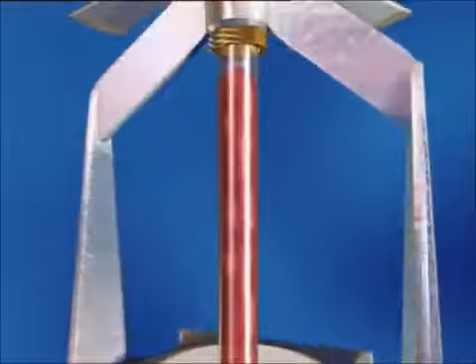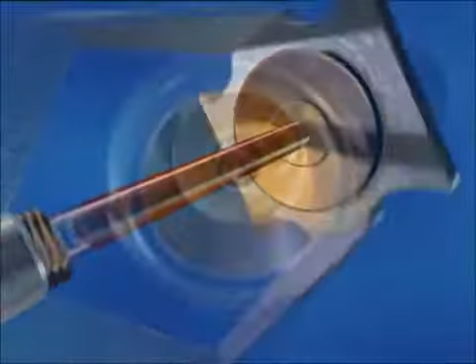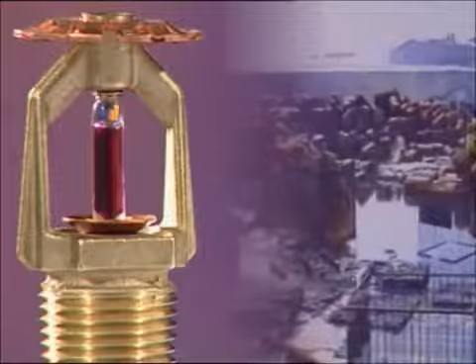Fire sprinkler systems were invented over 120 years ago. Since then, several hundred million sprinkler heads have been installed throughout the world. In that time, they've effectively protected thousands of buildings, helped prevent the financial collapse of numerous businesses, saved countless lives, prevented innumerable burn injuries, and protected the environment from catastrophic fire-related pollution. They're universally acknowledged as the most effective first line of attack against fire.

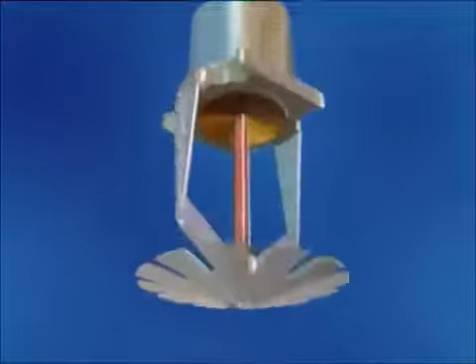The world's first rules for the design and installation of automatic fire sprinklers were written in the UK by John Wormald in 1885. Fire sprinkler systems in the UK are generally designed in accordance with British Standard 5306 Part 2 and, in some instances, Loss Prevention Council (LPC) rules for automatic sprinklers. American rules may sometimes be used, being Factory Mutual or National Fire Protection Association.

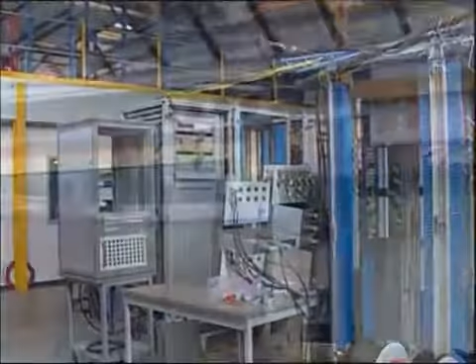Sprinklers are designed to cope with the fire risk presented by each individual building and may also be specifically configured to save lives.

Water still remains the most effective firefighting medium available. Sprinklers will deliver water right into the heart of a fire during its early stages through a specially designed sprinkler head.

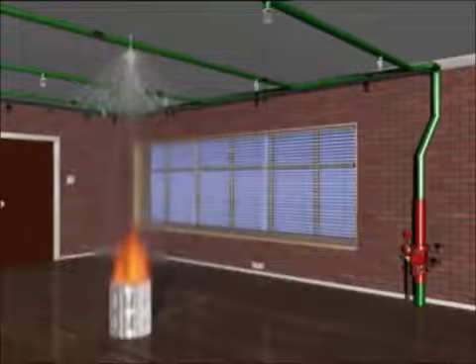Sprinkler heads are unique. They automatically detect a fire, discharge water right into the seat of the blaze, and operate a local alarm. They can also operate a remote alarm to alert the fire brigade or other emergency centre.

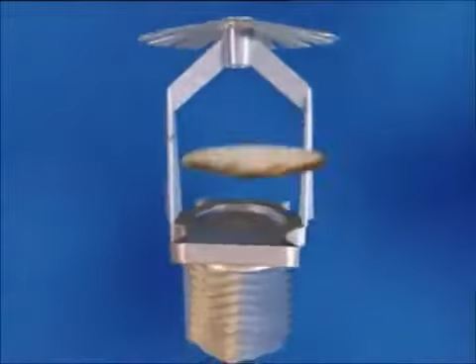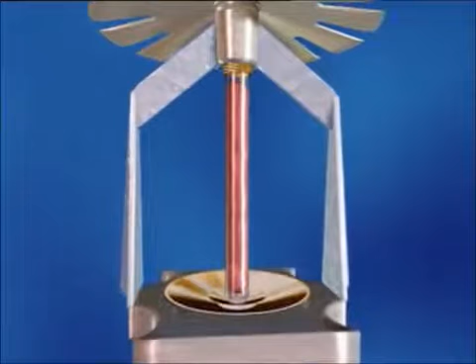A typical sprinkler head comprises a threaded body to connect to pipework, with a valve seal to hold back the water. The valve seal is retained by a glass bulb which contains a liquid that has a high coefficient of expansion. A small measured quantity of vapour remains trapped when the bulb is hermetically sealed.

When the liquid expands under the influence of heat from a fire, pressure in the bulb rises until the vapour is compressed. Further increases in temperature cause a rapid build-up of pressure sufficient to shatter the bulb, releasing the valve seal and allowing the water to flow onto a water distribution deflector. This results in an even distribution of water droplets in a predetermined pattern over the fire.

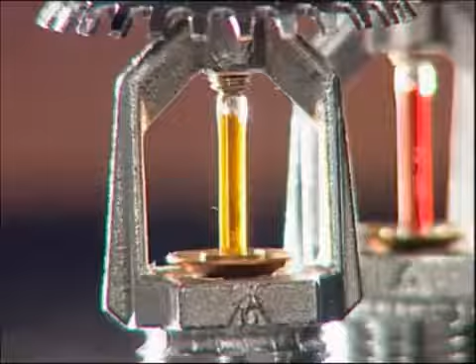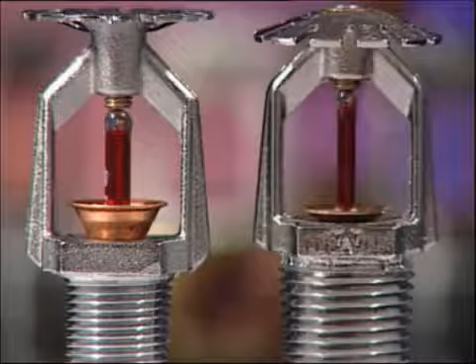Sprinkler heads are available in a variety of operating temperatures, which are identified by the colour of the bulb. The specifier has a vast array of sprinkler heads available to him. Each type of head is designed to cope with different fire risks, different operating temperatures, and different operational requirements. The British Standard defines fire risks as light hazard, ordinary hazard, or extra high hazard. Generally, as the hazard increases, so does the water discharge or density discharge.

Conventional sprinklers can be mounted in either the upright or pendant position, with a deflector designed to spray a proportion of the water discharged onto the surface of the ceiling. Spray sprinklers in upright or pendant positions are used for applications where all the water needs to be discharged downwards.

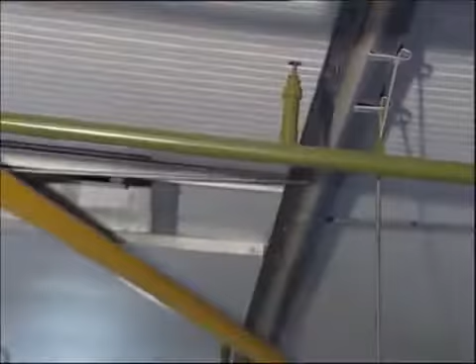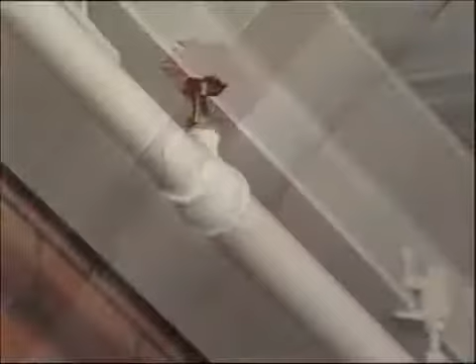Sidewall sprinklers are primarily used to keep ceilings clear of pipework for aesthetic reasons or to avoid having to disturb existing ceilings when installing. Each sprinkler protects up to 17 square meters in light hazard fire risks and 9 square meters in ordinary hazard fire risks.

Sidewall sprinklers with extended coverage are specifically designed to give an extended coverage of water distribution, with one sprinkler able to protect an area of up to 21 square meters. This type of sprinkler must have a quick response bulb.

In a fire, few deaths result from direct contact with flames. The greatest threat comes from inhalation of the products of combustion, such as carbon monoxide, hydrogen cyanide, hydrogen chloride, other toxic gases, and the associated heat.

The reaction time of quick response sprinklers minimizes the life-threatening levels of toxic gases and temperatures. In many environments, there are people who cannot escape without assistance, such as in hospitals or homes for the elderly. Quick response sprinklers provide valuable time for those in charge to assist their escape.

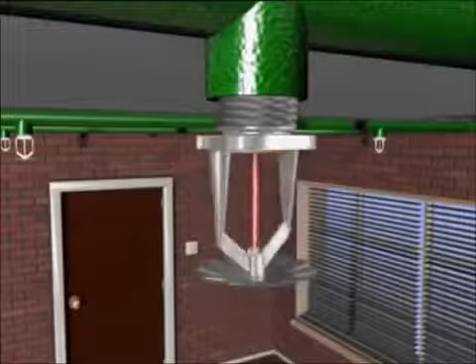A sprinkler head is connected to a water supply via a network of pipes fed throughout the building. The area protected by each sprinkler head can vary from 9 square meters to 21 square meters depending on the fire risk. The pipework is hydraulically designed to ensure the correct flow and pressure of water is maintained at each sprinkler head.

The water supply to the system can be fed from the town main for light to medium fire risks, such as residential, offices, hotels, and light manufacturing and commercial occupancies. For high fire risk areas, such as heavy manufacturing and warehouse storage, a pumped supply from a water storage tank or reservoir is normally necessary.

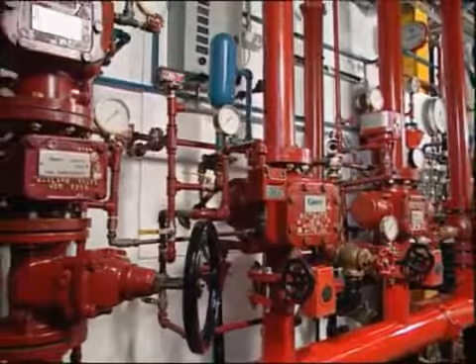The design requirements are specified in the British Standard BS 5306 Part 2 and LPC, FM or NFPA design rules. A control and alarm valve automatically delivers the flow of water to the sprinkler heads. There are generally 5 types of sprinkler system that all require different valve arrangements.

A wet system is where the pipework is permanently charged with water and used to protect premises where temperatures are unlikely to fall below freezing point.

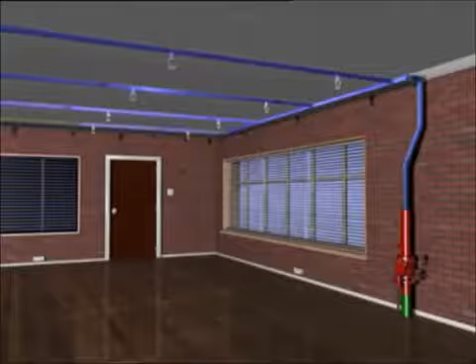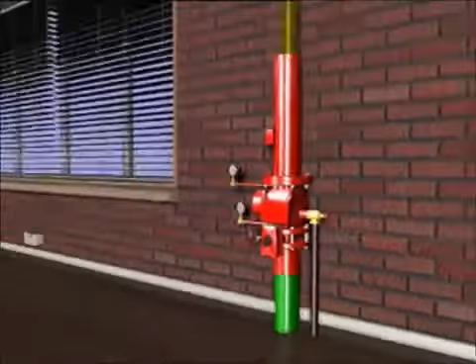Where the ambient temperature may fall below freezing point, the presence of static water in the sprinkler pipes is clearly undesirable. In this situation, a dry system can be installed in which the pipework is charged with compressed air. When a sprinkler operates, the compressed air is released and the control valve opens, allowing water to flow into the pipework and discharge from the operated sprinkler heads.

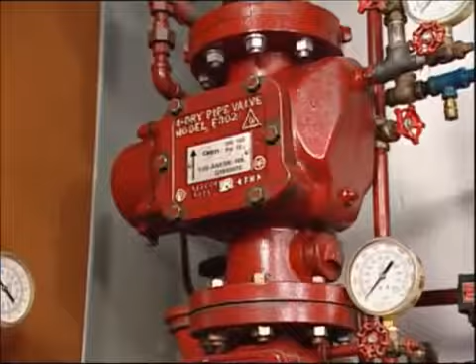An alternate wet and dry system, as the name implies, allows the system pipework to be alternately charged with water in summer and with air in winter, when there is a risk that the ambient room temperature can fall below freezing.

Pre-action systems are comprised of a standard sprinkler system and an independent electrical system of heat or smoke detectors installed in the same areas as the sprinklers. On receipt of a signal from 2 or more detectors, the main control panel automatically opens the control valve, allowing water to flow into the sprinkler pipework.

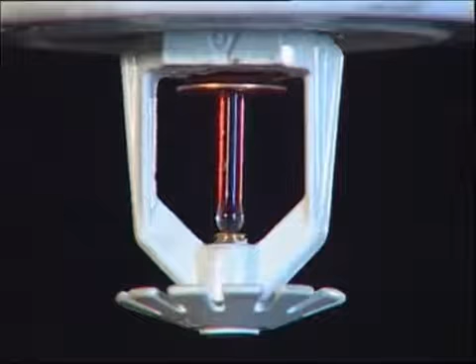Water is only discharged when the individual sprinkler heads reach their operating temperature. Any physical damage to a sprinkler in a non-fire situation will not result in water discharge, but will cause both visual and audible alarms to be raised at the main control panel only.

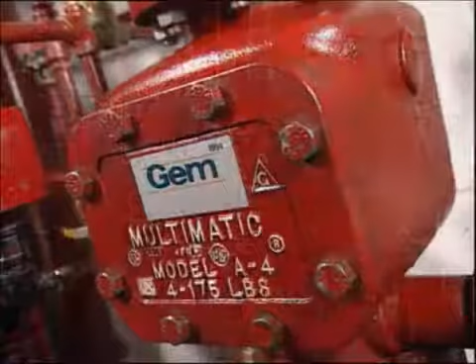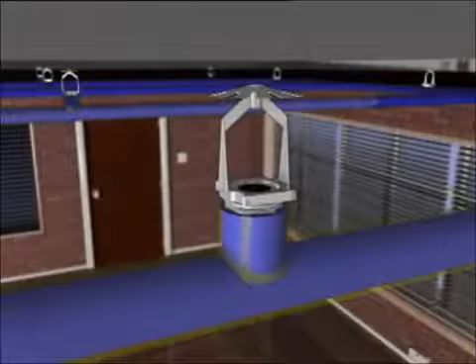A deluge system, unlike any other typical sprinkler system, is designed specifically for high-hazard applications with fast fire growth potential. The deluge valve is actuated by a separate detection system responding to a fire. This brings a large number of open sprinklers into action simultaneously throughout the protected area.

The successful performance of sprinkler systems has been detailed in records from across the world, paying testament to their outstanding reliability and effectiveness. In Australia and New Zealand, where it's a requirement that all fires must be reported, records reveal that over a 100-year period, sprinklers successfully controlled 99.5% of fires in sprinklered premises.

Statistics collated in Europe over the last decade are remarkably similar, showing that in fully sprinklered premises, 99% of all fires have been controlled by the sprinkler system.

The reason sprinklers are so effective is because they attack the seat of the fire before it has time to grow and spread. There's no excessive use of water.

In Germany, for example, 86% of fires in sprinklered locations have been controlled by 5 or fewer heads. In the UK, it's reported that of the fires in sprinkler-protected buildings over a 10-year period, almost half were controlled by 1 or 2 sprinkler heads only.

Fire brigades, local government authorities and politicians alike have all seized upon these statistics. This has generated numerous campaigns for sprinklers to be installed in applications that could only ever have been dreamt about when sprinklers were first commercially launched over 120 years ago.

That's because sprinklers are unique. They not only detect a fire and raise an alarm, they operate to control it and in many cases extinguish the fire before the arrival of the fire brigade.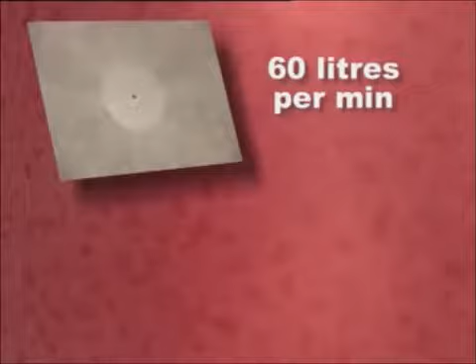Only the sprinkler heads closest to the fire operate. Water is discharged by a sprinkler directly onto a fire at a rate of a minimum of 60 litres per minute, in comparison with an unsprinklered building where the fire brigade using only 1 fire hose could discharge 500 litres per minute. The fire will also be much larger, as it will have grown for at least 10 minutes before the fire brigade arrive, so the likelihood is that more than one hose would be used.

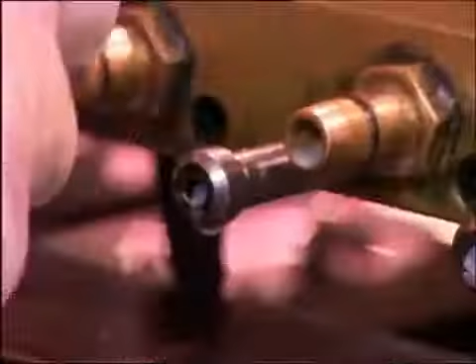Worldwide research shows that of the 40 million sprinklers installed every year, only 2 may operate accidentally. This is because every head is individually tested before leaving the manufacturer.

Sprinklers are economical to install. For example, in the case of office blocks and hotels, the sprinkler system would cost about the same to install as a quality carpet for the equivalent area.

Sprinkler systems will have a lifespan of at least 25 years, probably 50 years. Some systems are still in use today that are over 120 years old.

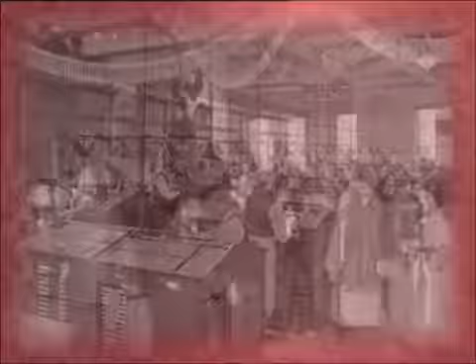The threat from fire will never change. It will always be with us, endangering life, property, and the environment we live in. Fire sprinklers will protect us and future generations. Fire sprinklers. Protection for life.